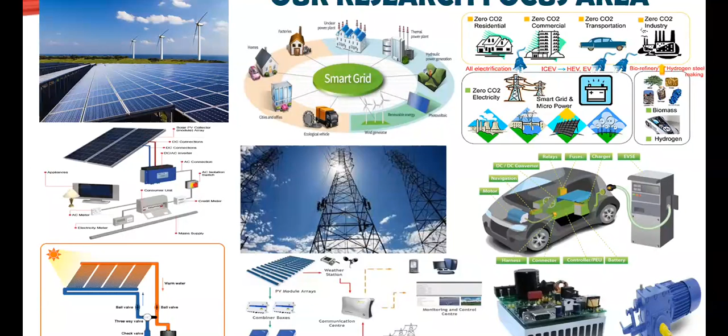At University Malaya Power Energy Dedicated Advanced Center, we work on smart grid systems, EV or electric vehicle research, solar energy research, and PCM, that is phase changing materials for solar panels. These are our key research areas.

This is our core business, which is our research activities. We focus on research activities and international conferences. We don't only do research, we also patent our research and bring out prototypes and products. We have a few products already, one being our self-cleaning glass coating, and we also came out with our own inverters for solar panels.

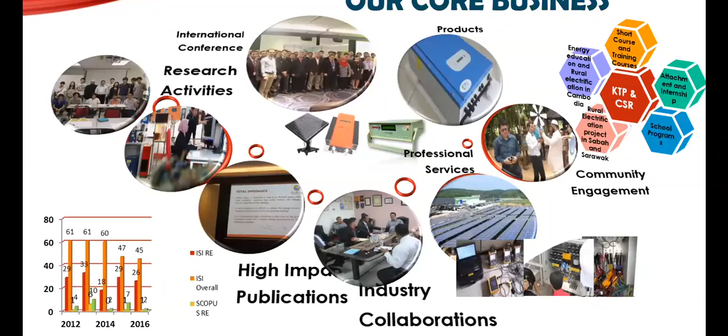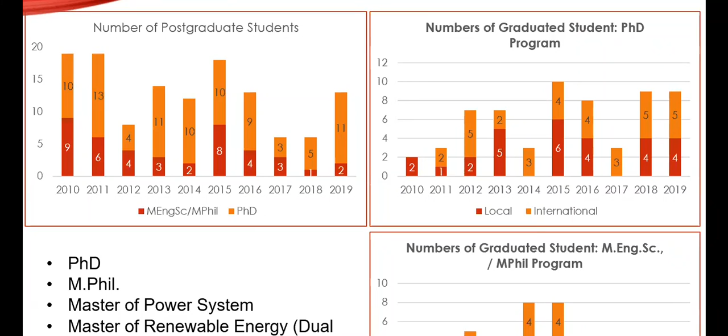This is our own postgraduate students. We also supervise postgraduate students, graduate students, and master's students as well. This is our research products which we have already obtained.

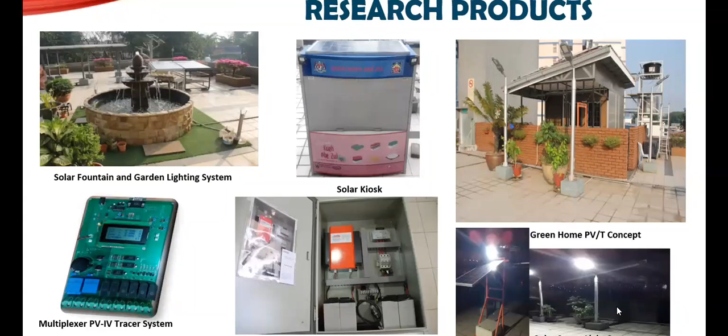So this is our solar kiosk, which is self-lightable by itself using just a solar panel. Our solar fountain and garden lighting systems in our own farm, and this is our green home of photovoltaic PVT concept, and solar street light systems, which we have already set up in our department itself.

So this is our research products, which we have already brought into the market. These are the research products.

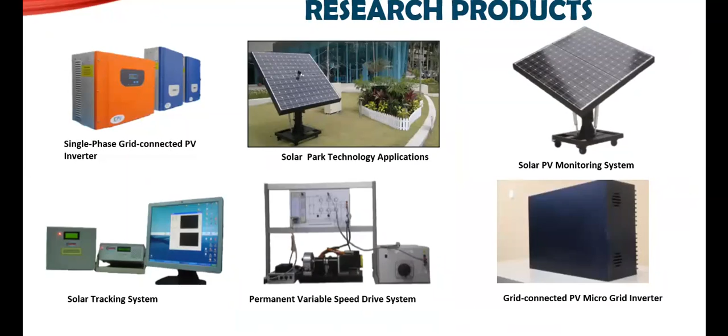Now I'll go into the topic today. The topic of my talk is self-cleaning industrial coating.

My name is Dr. Venkateshwaran from University Malaya Power Energy Dedicated Advanced Center, Institute of Advanced Studies, University of Malaya, Kuala Lumpur, Malaysia.

Now, here we are going into why we came out with this technology, or why we came out with these coating systems. The introduction covers the problem statement, objective, and experimental, then we go into results and discussion and the ideas and future works we are going to perform. First of all, when we are talking about dust and dirt on glass surface, this is not only on solar panels, okay?

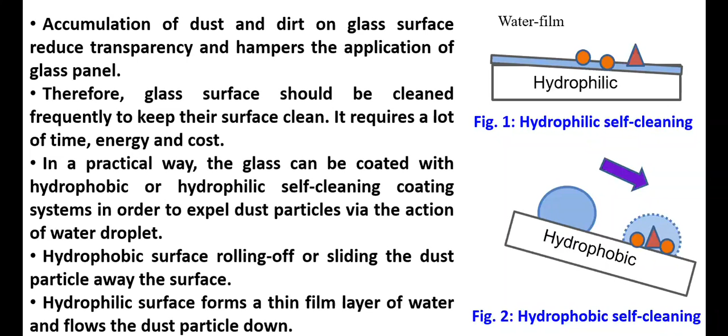So next, our problem statement: most research studies have developed self-cleaning coating. However, the process is too complicated, time-consuming, requires specific equipment and machines, and can be applied only on small glass substrates, not on a bigger piece of panels.

Over here, the research conducts their self-cleaning tests in lab environment only. Hence, the self-cleaning performance against outdoor environment is still doubtful. So several self-cleaning coating systems exhibit low transparency in the UV visible region and seem impractical for photovoltaic and window glass.

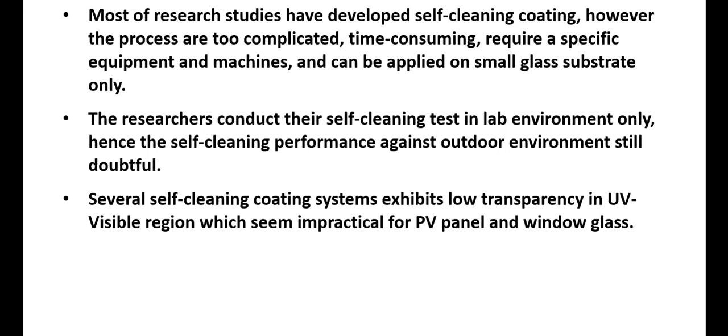Next, our main objective is to find a novel self-cleaning hydrophobic coating that can be spray coated on a large glass scale, with an easy synthesis process, and can be cured at room temperature. We don't want any oven curing process over here, so there is no oven curing process. It can be cured at room temperature at ambient condition.

Number one. Number two, to synthesize a transparent self-cleaning organic coating with the best blending ratio on the glass substrate, and to improve the self-cleaning ability, hydrophobicity, and anti-fog property by adding nano calcium carbonate particles into the best blended binder system.

Okay, because when we are talking about a coating system, it must consist of fillers, that is nano calcium carbonate, and also binders. Binders are what binds the nanofillers with the glass substrate. So we need to identify what binder is useful, or can bind with the glass substrate.

Because the photovoltaic panel on top is a glass substrate, or building glasses, we have only glass materials. So another thing is to discover a durable composition of an organic binder system that can strongly adhere the nano calcium carbonate onto the glass substrate, because we need a proper binder system that can adhere the nano calcium carbonate, meaning it can hold it onto the glass substrate and also within the coating system. That is the reason.

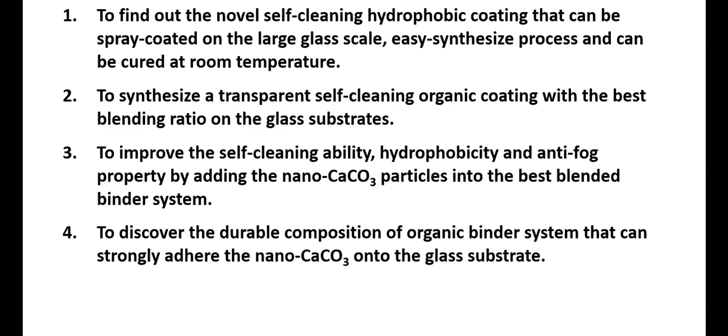Apart from that, we do a dip coating on the glass slide, or we can do a spray coating method. Dip coating is for small glass substrates like glass slides, while for large glass plates we use the spray coating method. We leave it to dry at room temperature, and it dries within 10 to 15 minutes at ambient conditions.

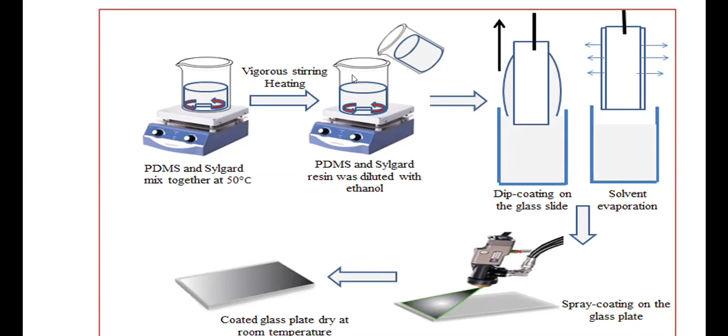So this is our formulation of PDMS and Sylgard, where we increase the weight ratio of Sylgard while we fix the PDMS ratio, and we find what is the best property out of it.

After we do the coating system, the PDMS-Sylgard system, we perform water contact angle measurement to see the hydrophobicity of the coating system, and check the cross-linking ability using Fourier transform infrared spectroscopy. We also test mechanical properties, anti-fog properties, and outdoor self-cleaning performance.

Once we get the best blending ratio of PDMS and Sylgard, we introduce nano calcium carbonate into that system and do the same characterization. But now we also use FESEM to see the dispersion of the nano calcium carbonate on the substrate, FTIR spectroscopy to see the cross-linking ability, and water contact angle measurement to see whether the hydrophobicity is increasing or declining.

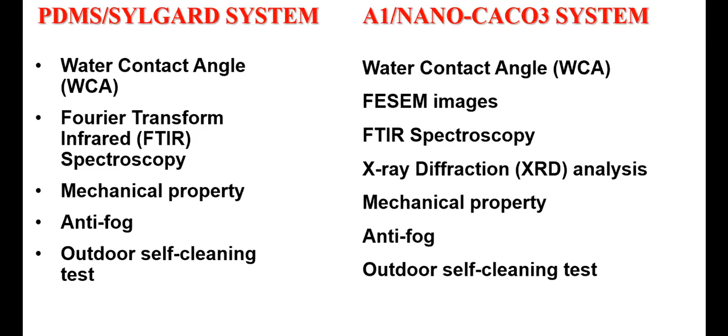Apart from that, we do X-ray diffraction analysis to see how the calcium carbonate is bonded, whether it is on the surface or inside the coating system. We also check the mechanical properties, anti-fogging properties, and outdoor self-cleaning testing. So these are the tests we carried out.

So for the binder system with PDMS and Sylgard, once we increase the Sylgard ratio into the PDMS, the bare glass shows a contact angle of about 59 to 60 degrees. The water contact angle measurement is 60 degrees.

When we introduce the coating system with PDMS and Sylgard together, the water contact angle tends to increase and the hydrophobicity tends to increase. As the Sylgard ratio increases from S1 to S2, the contact angle increases, then it starts to decrease back - it goes up and comes down.

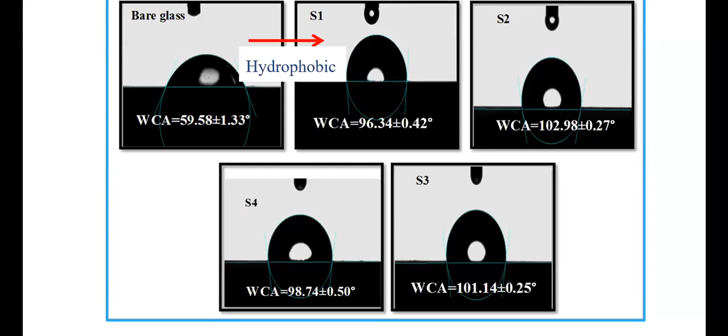And why? That is due to the cross-linking ratios. We would say that the PDMS-Sylgard coating improves the water contact angle of bare glass above 90 degrees. PDMS-Sylgard resin consists of non-polar methyl groups like CH3 at the interface that have minimum interaction with the water droplet, and higher content of Sylgard improves the water contact angle, with S2 reaching as high as 103 degrees.

However, excessive Sylgard reduces the water contact angle because the system becomes a more hybrid network of SiOH, silicon hydroxide methyl group chains. This hybrid network causes a decrease in silicon-carbon chain length, leaving behind unreacted long alkyl chains. These unreacted long alkyl chains lead to a decrease in hydrophobicity of the S3 and S4 coated substrates as the Sylgard value increases. This we have already published.

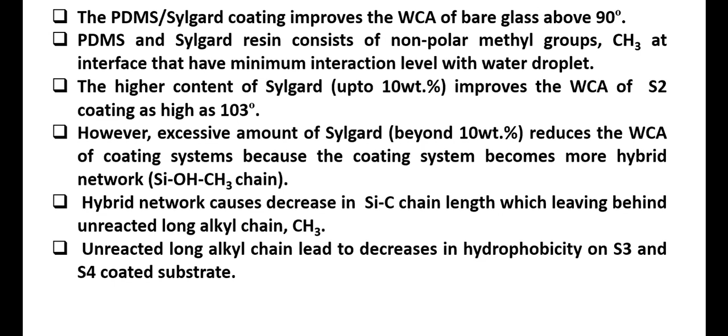Okay, so this is the EDX which we have done on the binder system alone, where you can see that when the Silgard weight ratio is increasing, the carbon content is increasing. Then it starts to decrease because higher cross-linking is taking place, and the carbon ratio becomes lesser.

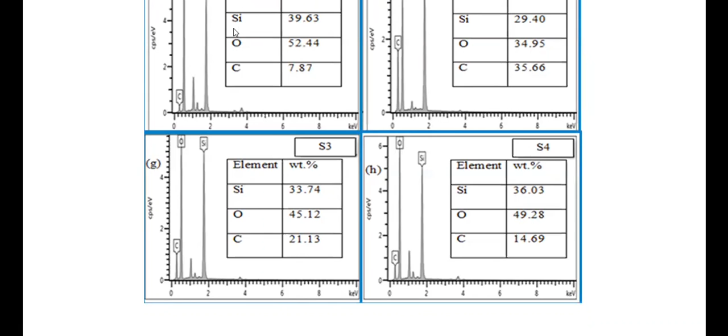This is another evidence of it. So this is Fourier transform infrared spectroscopy. Over here, the pristine PDMS represents FTIR peaks of CH3 stretching, Si-O-Si stretching, and Si-CH bending. And the OH peak in PDMS-Silgard is ascribed to vibration of hydrogen bonded ethanol molecules.

So Silgard contains C=C double bonds in its structure that can chemically react with the polymer of the PDMS matrix. So the C=C stretching at 1650 cm-1 decreases in intensity with increasing Silgard content, because the CH=CH chain in Silgard intermediate has reacted with the silanol group in PDMS.

So the Si-O-Si splits into separated bands at 1020 cm-1 and 1090 cm-1, indicating formation of a hybrid coating structure where functionalization of silanols linked through siloxane bridges by methyl groups. The silicon-carbon bending mode decreases with increasing Silgard content because hydrocarbon parts of the PDMS-Silgard molecules start to get in between the ethanol molecules.

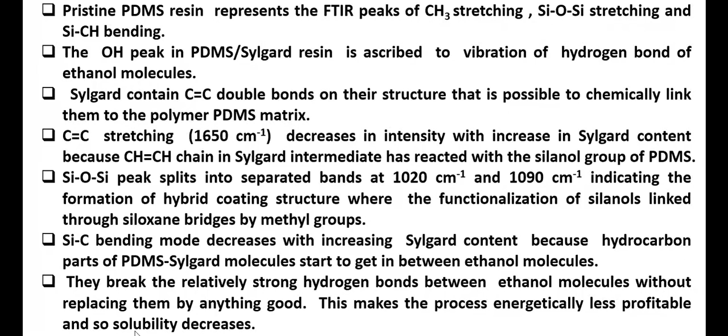They break the relatively strong hydrogen bonds between ethanol molecules without replacing them with anything good, and this makes the process energetically less favorable, so the solubility decreases. This is why the hydrophobicity decreases here.

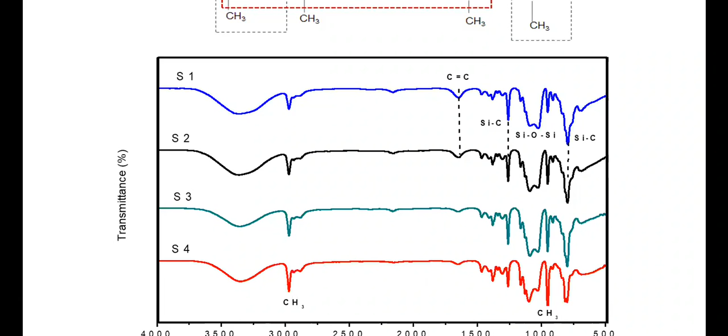So when we see the Sylgard, when it increases by weight percentage from 5 weight percent to 20 weight percent, at 5 weight percent a low reaction of PDMS takes place. Ideal is 10 weight percent Sylgard, and above that is a high reaction of PDMS with Sylgard, which increases the cross-linking density.

Apart from that, for any coating we have to see what is the mechanical stability of the coating. So we do a scratch test using one of our instruments for micro scratch hardness testing, and that is one of the very important tests in the coating industry.

So now, when we scratch, we can see that transverse cracking takes place, partial ring cracks, tensile cracks, delamination takes place here, and total failure takes place here.

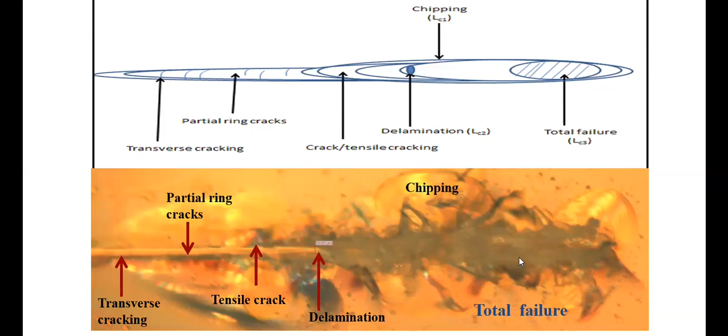So from here to here, the force which we apply on the needle increases as it goes up further. From here, with 4 Newton force, we get the failure point in S1. The failure point in S2 is also observed. But in S3, there is no failure observed with 4 Newton.

And the failure point is again observed in S4 at high dense cross-linking density, which turns the coating to be more brittle. The organic coating becomes more brittle due to higher cross-linking densities.

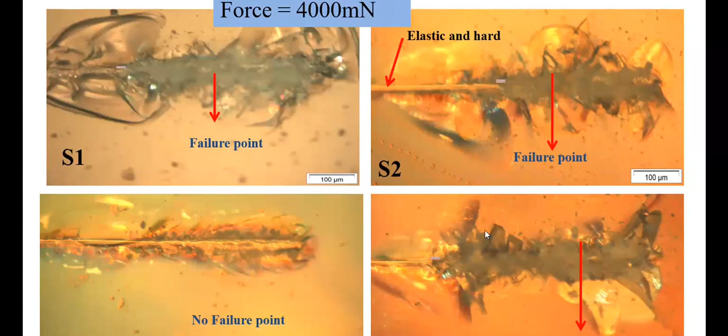So from here we can conclude that the PDMS-Sylgard coating exhibits elastic and stiff properties that resist deformation of the coated substrate at lower applied load. The cross-linking density significantly alters the tensile stress-strain behavior of the resins. A higher degree of Si-O-Si cross-linking in elastomers restricts the ability of chains to uncoil and raises the stiffness of the coating.

Next, a higher number of cross-links in PDMS would create more identical terminating methyl groups that act as a binder. Because when the cross-linking of Sylgard introduced in the PDMS becomes higher, it creates more identical terminating methyl groups that act as a binder. So a low degree of cross-linking constructs a less rigid coating system that results in slightly lower hardness.

And S3 coating has higher hardness. Strong Si-O cross-linking delays crack propagation and initial fracture behavior. The S4 coating has slightly lower hardness because of saturated cross-linking density, building a hard and brittle self-linking silicon resin network during curing.

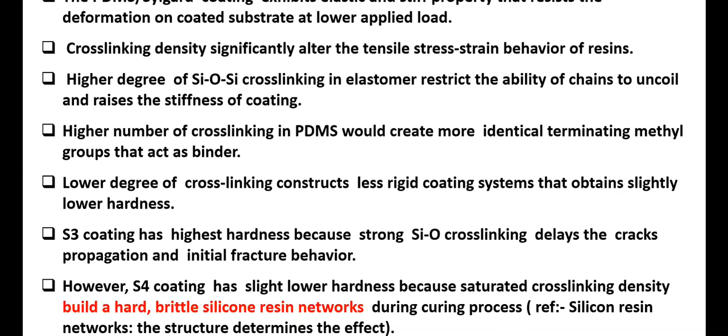The silicon resin network and its structure determine the effect. This is why, when the cross-linking becomes higher, the hardness becomes lower - meaning it becomes more brittle. It builds a hard and brittle silicon resin network during curing, which fails and becomes a brittle coating.

So this is Vickers hardness - we have done Vickers hardness testing as well. You can see that the S3 coating system has the highest hardness of 9.81 gigapascal. This corresponds exactly with what was seen in the micro scratch test.

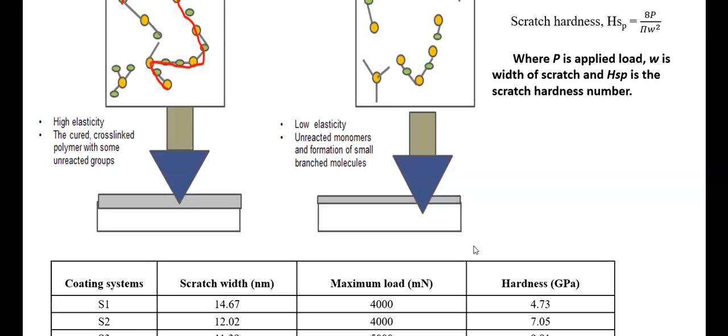This is the anti-fog property. For the anti-fog property test, we take our glass substrate, which has been coated with our coating system, and put it on hot water vapor, and leave it there for the water vapors to evaporate.

So the anti-fog performance of the bare glass and PDMS coating systems was tested at about 130 degrees Celsius, above the boiling point. We can see the evaporation time of the coatings varies, and the evaporation is very fast due to the hydrophobic properties.

The bare glass takes 25 minutes, now it becomes 10 minutes. It's more than half, and this is due to the hydrophobicity of the coating system.

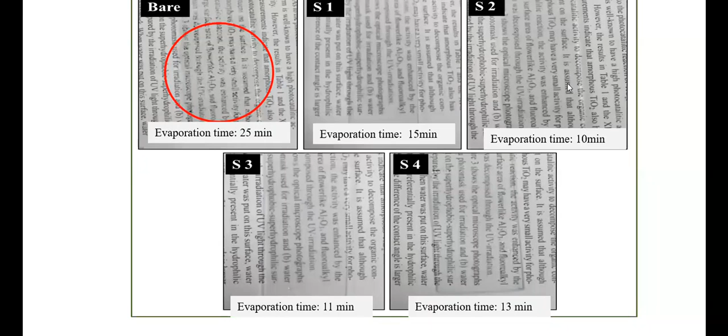So this is what has been cleared over here. The bare glass substrate possesses a blurry image due to large droplets. The large droplet condenses immediately on the glass surface, then scatters the incident light. All the PDMS Sylgard coated samples displayed clear images because the coated glass was adhered by tiny mist droplets only.

The S2 and S3 coatings show the fastest evaporation time among the PDMS Sylgard coated surfaces, and this possesses a higher amount of non-polar methyl groups, SiCH3, at the interface. This high amount of methyl group gives stronger repulsion to the polar fog droplets and inhibits the nucleation and growth of fog droplets.

The S4 coating shows the longest evaporation rate because of saturated SiO-Si linkage at the interface, giving strong attraction to the fog droplets. These tests were carried out using the standard test BS-EN 168, where S2 and S3 coatings can maintain their anti-fog performance, while S1 and S4 are affected due to large droplets adhering to the coating.

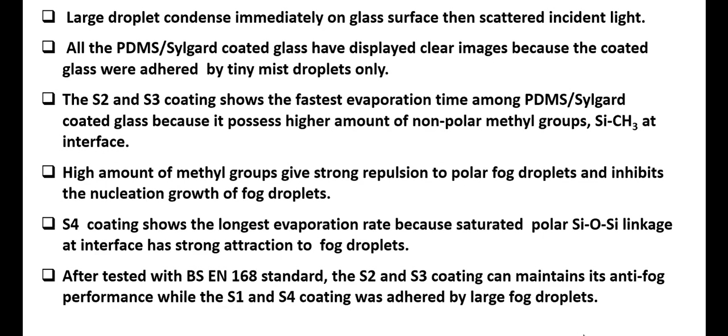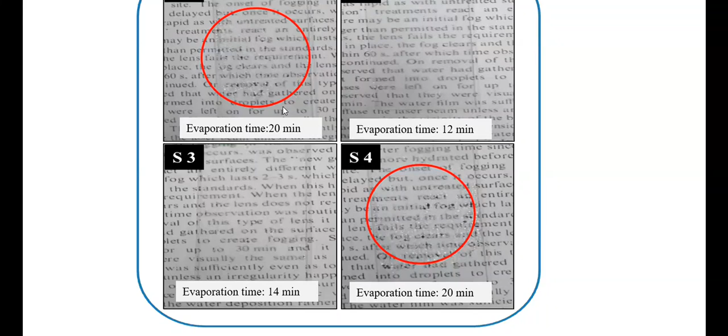So this is how we can see the anti-fog performance with the BS-EN 168 standard testing method. From here we can see that S2 has 12 minutes, about 50% lower than S1 and S4 coating systems. So we have chosen S2 as the best coating binder system, and now we introduce calcium carbonate into it and examine the water contact angle measurements.

So we are looking at the water contact angle measurements. When we introduce nano calcium carbonate into it, the water contact angle tends to increase, meaning the hydrophobicity tends to increase further.

With 0.4 weight percent of nano calcium carbonate, the hydrophobicity increases to a contact angle of 107. With 0.6 weight percent, it increases to 108, and with 0.8 weight percent, it increases to 110.

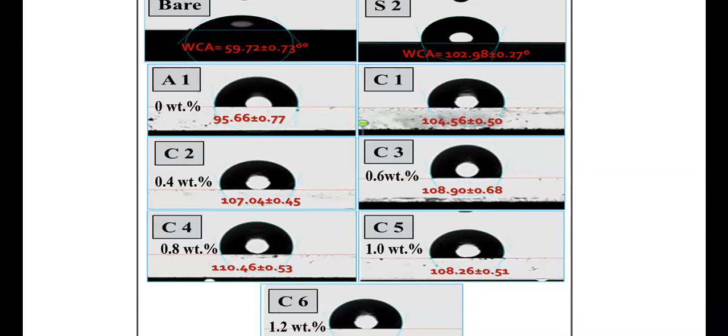But after that, it shows a decrease, and this is due to the agglomeration of nano calcium carbonate on the surface. This is what happens when we put nano calcium carbonate particles on top of the resin.

On your right, you can see the smooth A1 coating system. The A1 coating system recorded a lower water contact angle than S2, indicating possible interaction between hydroxyl groups and the silicone resin with polar water. The presence of residual oxygen-containing SiOH groups at the interface causes water to adsorb and tightly bond to the surface.

When embedded with nano calcium carbonate, it forms a cushion that repels the water droplets, increasing the contact angle between the coating and the water droplet. So the higher weight percent of nano calcium carbonate can achieve a water contact angle as high as 110, due to the formation of air pockets that suspend the water droplets, making it more hydrophobic.

The water contact angle for A1 and nano calcium carbonate coating systems C5 and C6 reduces or lowers because agglomeration of nano calcium carbonate creates narrow spaces, causing low surface roughness. At a weight percentage of 0.8 percent nano calcium carbonate, it shows the ideal maximum air pockets it can make.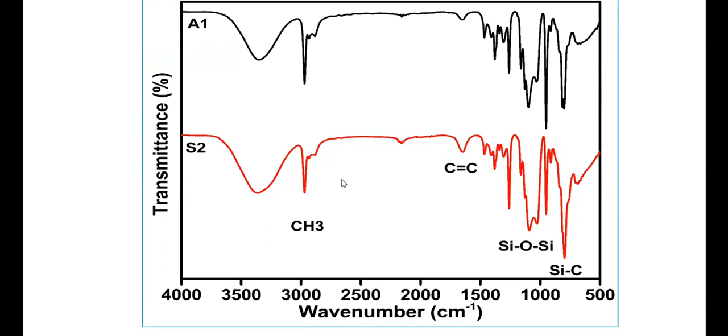So this is for FTIR, for FTIR coating systems. Over here, the FTIR spectra, this is for the S2 coating system and the A1 coating systems. This is with APTES, this is without APTES. So it's roughly the same.

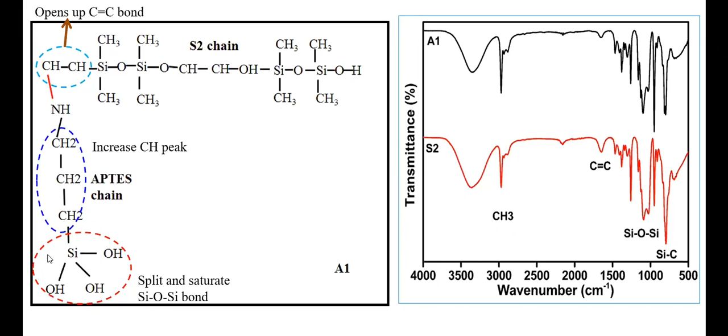Now, when we increase, what will happen here is with the S2 chain and the APTES, we are using the APTES in order to cross-link the Si-O-Si bond with the binder resin, and this is how the bonding is taking place. And almost similar FTIR peak with A1 coating because of low reaction with APTES, but the peak shift in FTIR spectra with various weight percentages of calcium carbonate confirms the reaction of calcium carbonate and APTES in the A1 matrix.

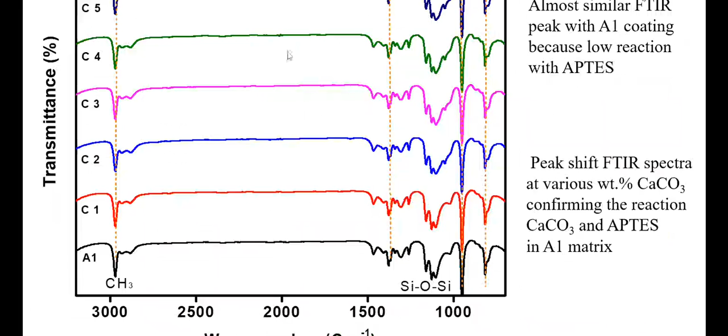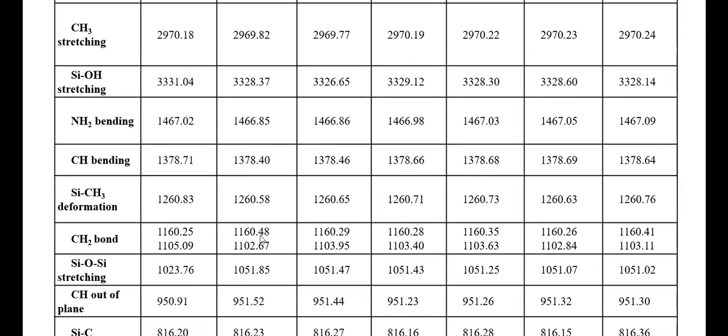So this is the FTIR band ratios which we have studied, where the peak shift has taken place at all these peaks over here.

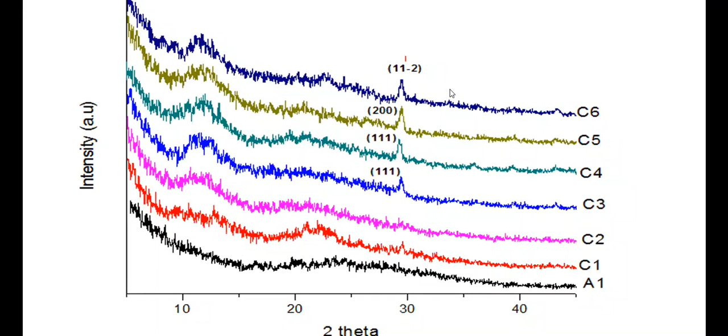So the C6 coating shows the sharpest crystalline peak at a 2-theta angle of 29.63, indicating a strong formation of the calcite phase. And the prepared resins from supersaturated nanocalcium carbonate are due to the absence of scale inhibitors, that is over here, the C6. You can see the sharp peaks due to the formation of nanocalcite of calcium carbonate, the nanocalcium carbonate.

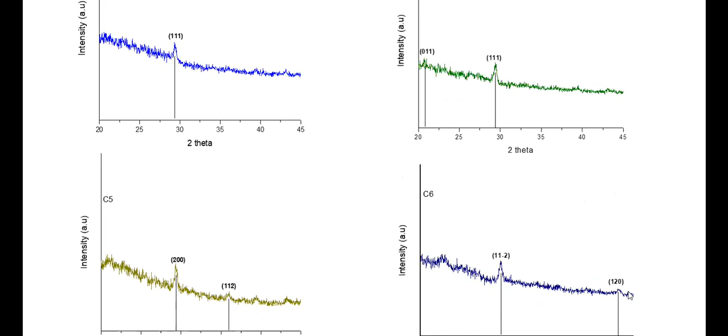So this is the XRD peaks of A1 with nanocalcium carbonate coating systems, where we can see the sharp peaks tend to increase, the 2-theta value sharpens to increase over here, and from here we can see that sharp peaks start to be observed at C3, C4, C5, C6 coating. The sharp peaks here are due to the crystalline at 111 due to aragonite calcite.

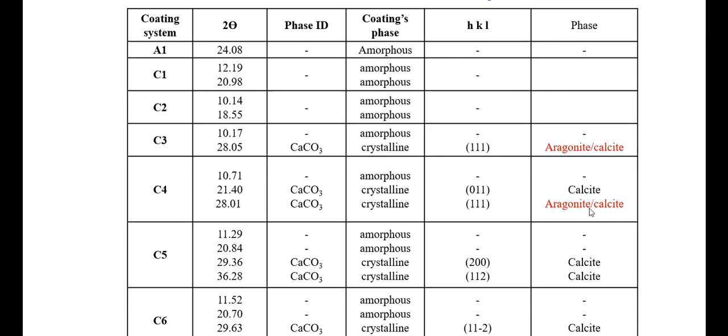In C4, we can see a stronger peak of calcite and aragonite calcite. And for C5 and C6, we see the strongest peak at 29.36 and 36.28. The same thing goes for C6, due to calcites. Okay, this is published.

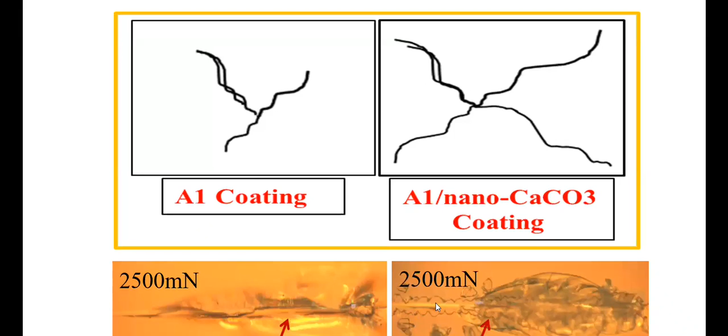So all the coatings show an elastic to plastic transition before subjecting to initial crack. A1 coating exhibits the highest hardness because of small crack size, as methyl groups at its interface are low interacting substitutes, creating minimum interaction with the indenter. So the substitution of nanocalcium carbonate creates less elasticity because nanoparticle aggregation generates interactive forces that later halt movement of the polymer chain. That is what the nanocalcium carbonate does as a filler.

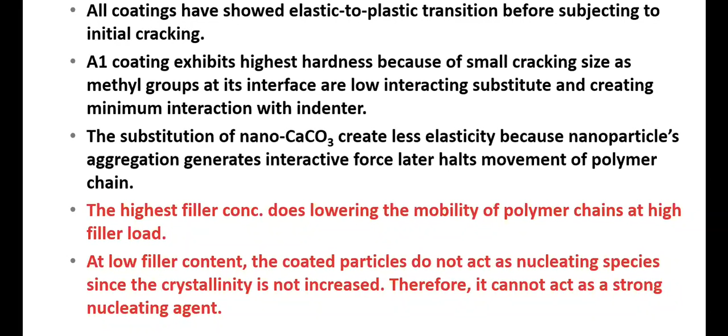The highest filler concentration thus lowers the mobility of the polymer chain at higher filler load, and at lower filler content, the coated particles do not act as nucleation species since crystallinity is not increased. Therefore, it cannot act as a strong nucleating agent.

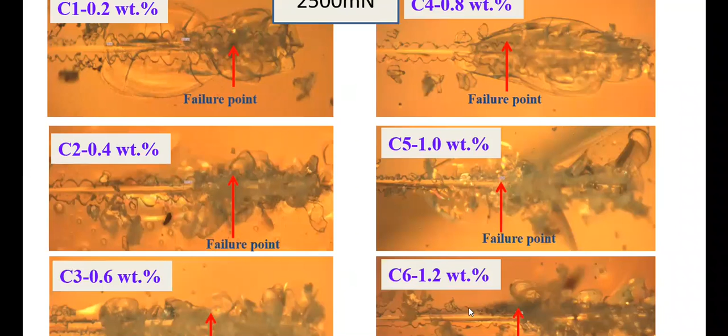So over here, you can see that the failure point is further out in C1, C2, C3, but it becomes shorter in C4, C5, and C6 due to the brittleness increasing.

So from here, we can see that the decrease in hardness must be due to the debonding of filler particles from the matrix polymer. The debonding of particles does not contribute to yield stress, and the failure of the coating can be attributed to the brittleness of the coating system due to high cross-linking.

Okay, so you can see the hardness decreases over here. So the hardness reduces as the composition of calcium carbonate particles increases.

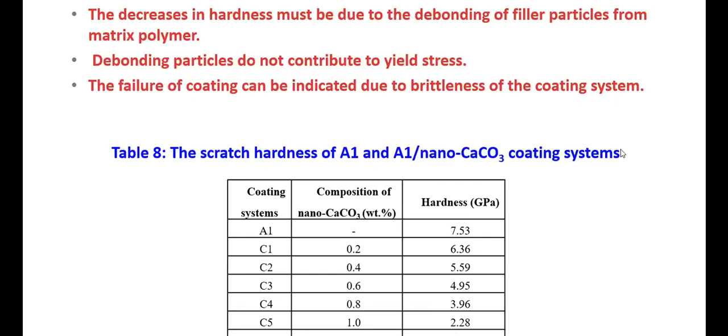So on the anti-fog properties, just now with only the binder system we saw that about 12 minutes is the best. But over here, the evaporation or condensation of water vapor on the glass becomes lesser with lesser time, with nano calcium carbonate particles.

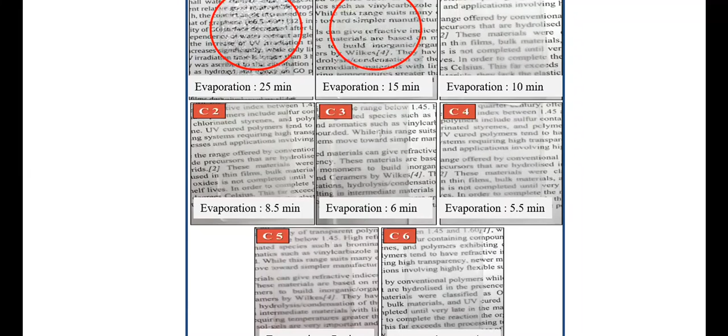This is why we are introducing nano calcium carbonate particles, because it creates air pockets. It's confirmed it is creating air pockets so that it does not adhere to the glass and can be easily removed from the surface. So over here, this is what we see, where the direct contact between

the silanol species and the fog droplets over here, and this is when the nano calcium carbonate is there, when it behaves like an air pocket, it creates an air pocket over here. This is the schematic diagram, and this test has been done according to the BS EN 168 industrial test standard.

So what our future work is going to be - because we are putting nanofillers into it, agglomeration tends to take place due to the nanoparticles. Therefore, we need to have an excellent dispersing agent.

And countries like Italy have an industry just been created only to identify dispersing agents for coating systems. So a dispersing agent, or a surfactant, is very, very important in order to disperse the nanoparticle so that it will not agglomerate and create this kind of problem.

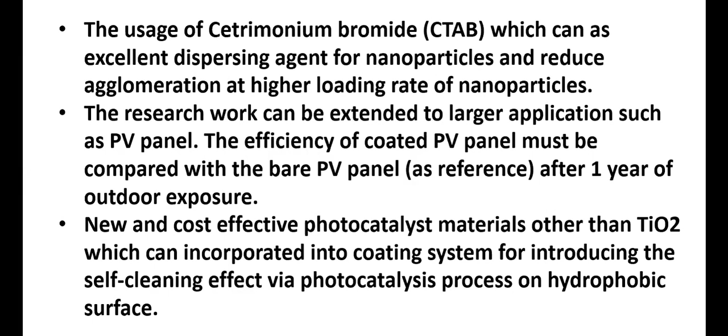The research work can be extended to a larger application such as PV panels, and the efficiency of coated PV panels must be compared with bare PV panels after 1 year of outdoor exposure. New and cost-effective photocatalyst materials other than TiO2, which can be incorporated into the coating system for introducing the self-cleaning effect via photocatalysis on hydrophobic surfaces, are also ongoing.

Okay, so these are our photovoltaic panels, where we have also spray coated our photovoltaic panel. The coated panel shows a degradation rate of 1.72 after 3 weeks in service. And for a bare, non-coated panel, it shows a degradation rate of 5.36.

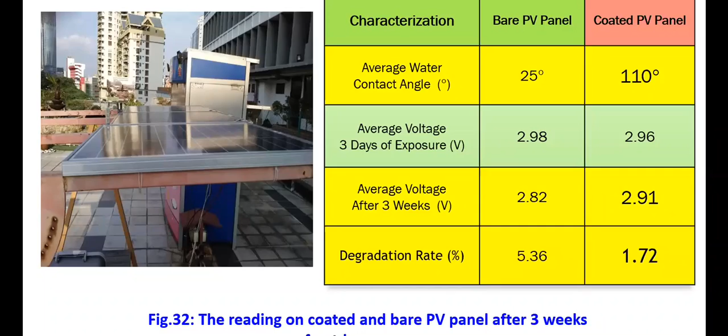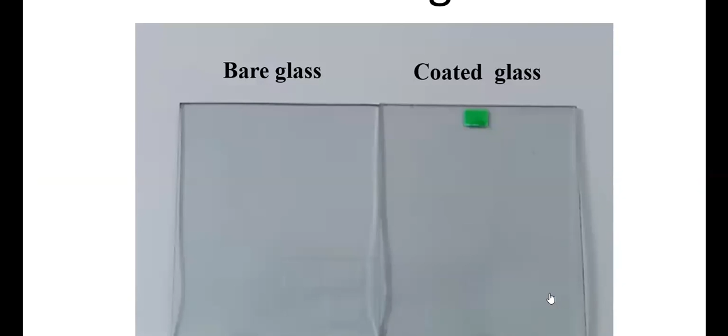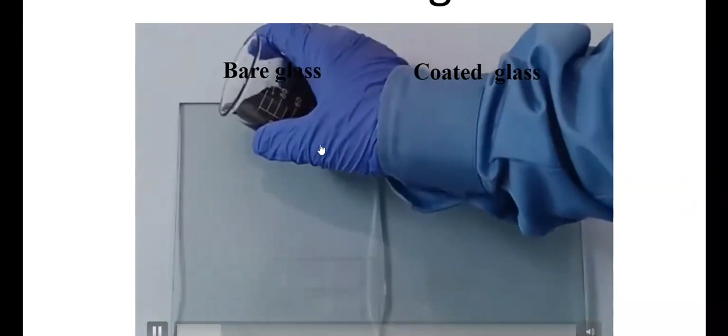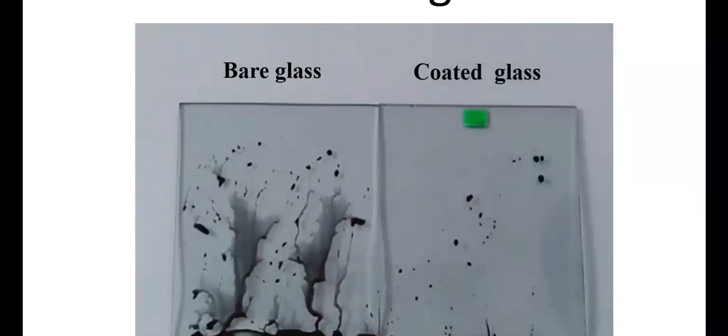So this we are pouring mud, a mud layer, on a bare glass and also on our coated glass surface. And you see on the coated glass, it is so hydrophobic and it is not sticking to the surface. Over here, it can be washed very easily on the coated surface compared to the bare glass, where it still has the dirt specks over here.